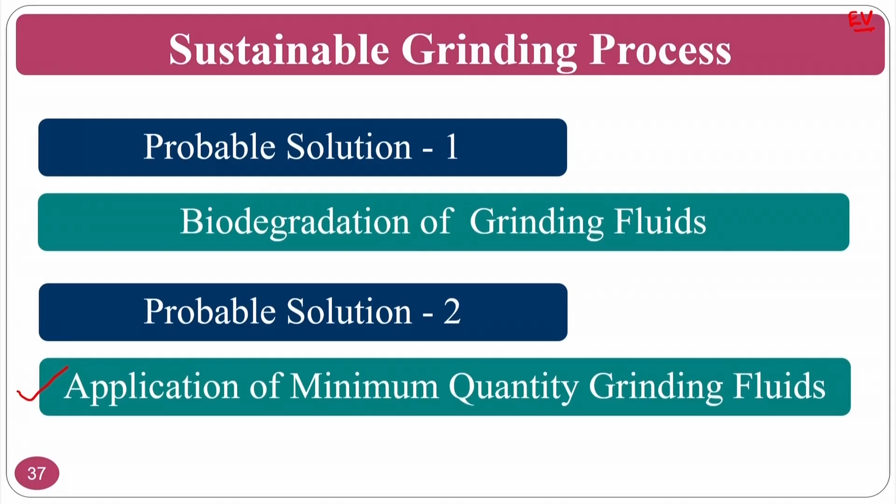So how do we go about the application of minimum quantity grinding fluid? The probable solution is minimum quantity cutting fluid, where you use the minimum amount of cutting fluid. Normally in flood cooling, where the cutting fluid drops by gravity, it will be 400 to 600 ml per minute. In this method, it normally ranges from 5 ml per hour onwards. It can increase or decrease depending on the air pressure used, and whether it's internal mixing or external mixing with the nozzles.

So what you are doing here is making the cutting fluid into a mist. You put in cutting fluid and highly compressed air, and these two mix to form droplets. These are the nanofluid or mist. The mist droplets fall into the grinding region. This is called minimum quantity lubrication, which we will see in expansion.

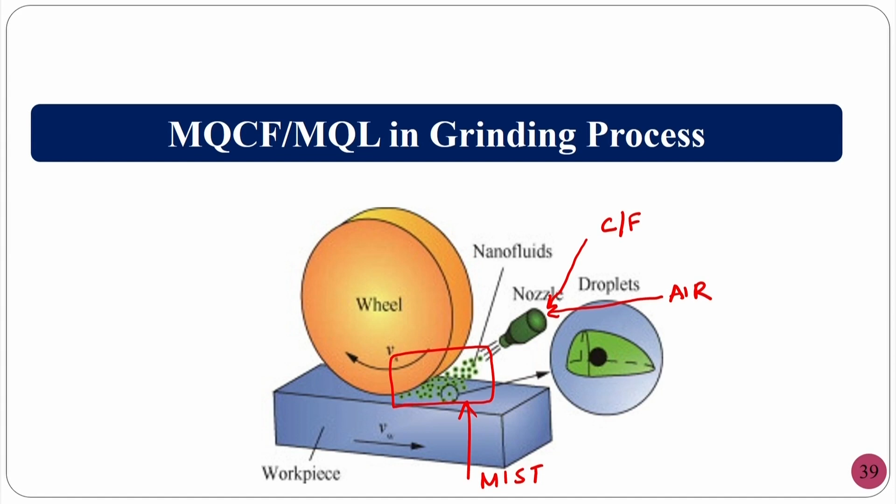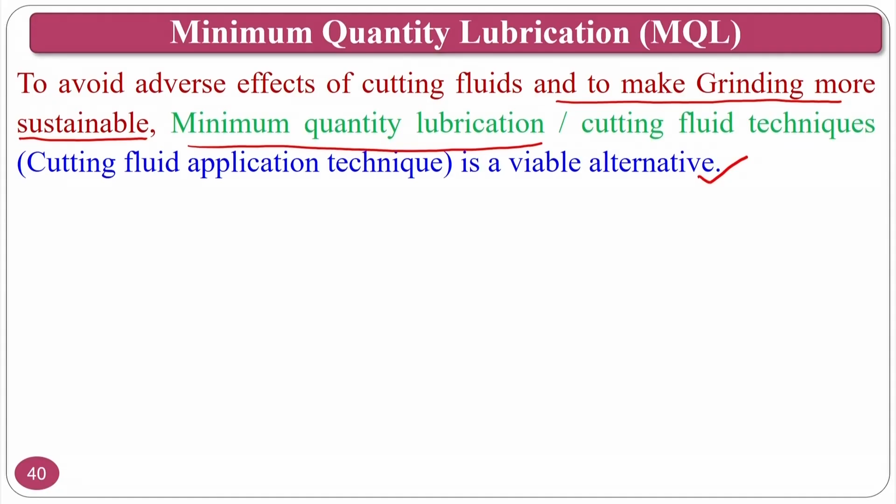To avoid the adverse effects of cutting fluid and make grinding more sustainable, minimum quantity lubrication or minimum quantity cutting fluid technique is a viable alternative to the flood cooling process. It uses a precision dispenser to supply a minuscule amount of cutting fluid to the wheel-workpiece interface, typically at a rate of 5 to 500 ml per hour.

You can see here, in flood cooling normally it will be like 500 ml per minute, whereas here it will be 500 ml per hour. That means you are reducing the amount of cutting fluid enormously, but without compromising the mechanical performance, that is, material removal or surface roughness and other things.

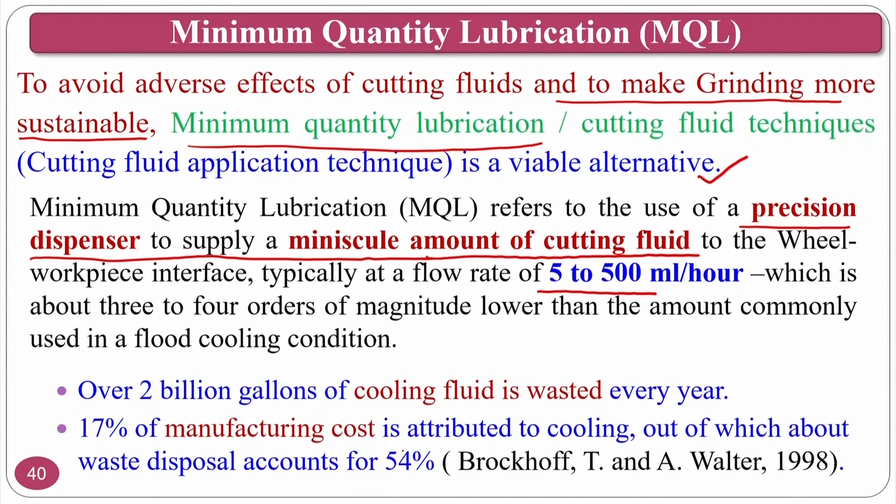If you see the literature, over 2 billion gallons of cutting fluid is wasted every year across the USA and across the globe. This cutting fluid has to be dumped somewhere. If 2 billion gallons of cutting fluid is dumped into rivers, sea bodies, or landfills, this is a drastic and dangerous thing that manufacturing industries are doing. So you should avoid that.

17% of the manufacturing cost is attributed to cutting fluid. Some books show 15%, some show 17-18%. Normally the range is 15 to 17% of the manufacturing cost attributed to cutting fluid.

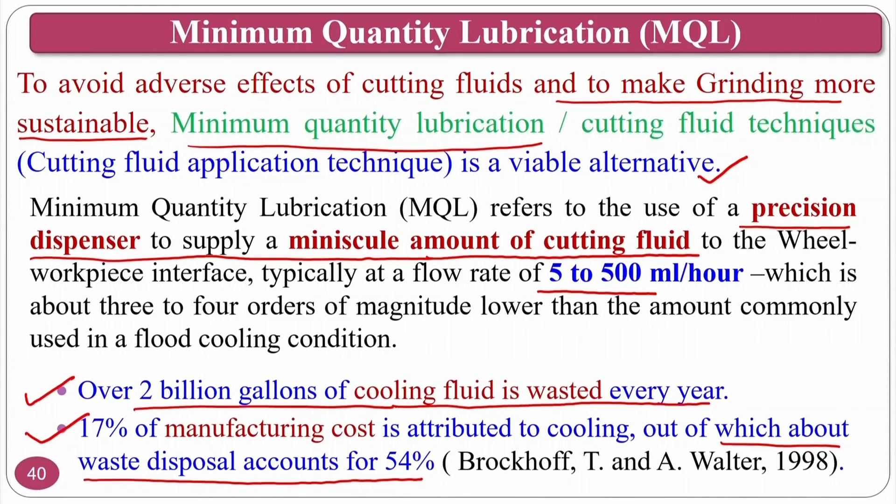At the same time, waste disposal accounts for 54%. That's why people just dump it, to avoid the additional cost of transportation and post-processing to make the cutting fluid biodegradable before dumping. To sell products at minimal prices, they avoid these things. But even if you sell at a slightly higher price, if you are helping nature and other people, that will be good.

What is minimum quantity cutting fluid? It is nothing but a cutting fluid mixed with highly compressed air, both mixing to come out as a droplet, nano size or micro size, an atomized mist.

Why are you mixing them? The convective heat transfer coefficient of the cutting fluid is very high, while the convective heat transfer coefficient of air is very low. Air is a gas, so it can penetrate into the interior zones of metal cutting or grinding, but liquid cutting fluid cannot. So we have one advantage and one disadvantage in the cutting fluid, and one advantage and one disadvantage in the air. The cutting fluid's high convective heat transfer coefficient is a positive, and the easy accessing capability of air being a gas is also a positive. So now we have to combine the two advantages.

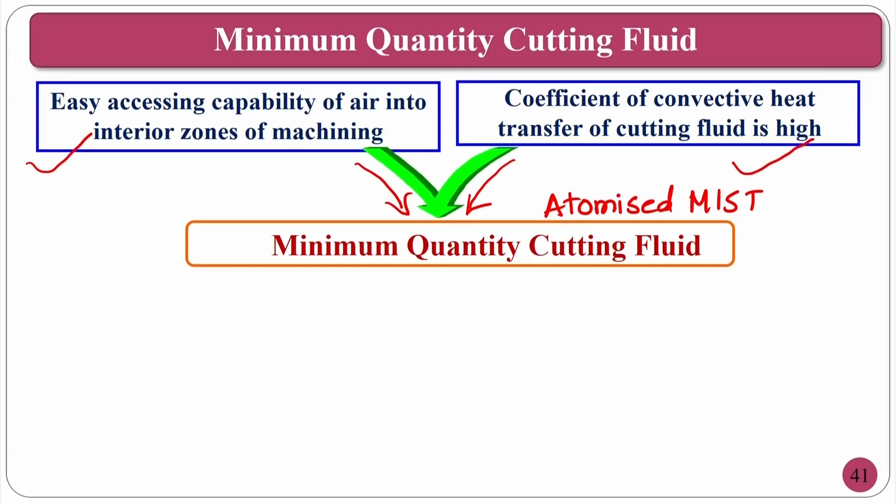Okay, in this atomized mist, what will happen? Convective heat transfer coefficient is retained, and at the same time it can penetrate, being a gas, into the interior zones of the machining or grinding process.

So as you can see, the cutting fluid mist is coming out of the nozzle and it is going in between the workpiece and the grinding wheel.

So your forced convection, in these circumstances, what will happen? The forced convection will take place and the heat transfer will be better, so that the performance of this finishing or machining, in terms of minimum quantity cutting fluid, will be much better compared to flood cooling.

The advantages: environmental friendly and green sustainable, because you are using very minute quantities of cutting fluid. No maintenance cost or waste, because here the mist goes off. There is no recycling or accumulating in the cutting fluid tank that you have to dump after some time, so there is no maintenance cost because it's one time use.

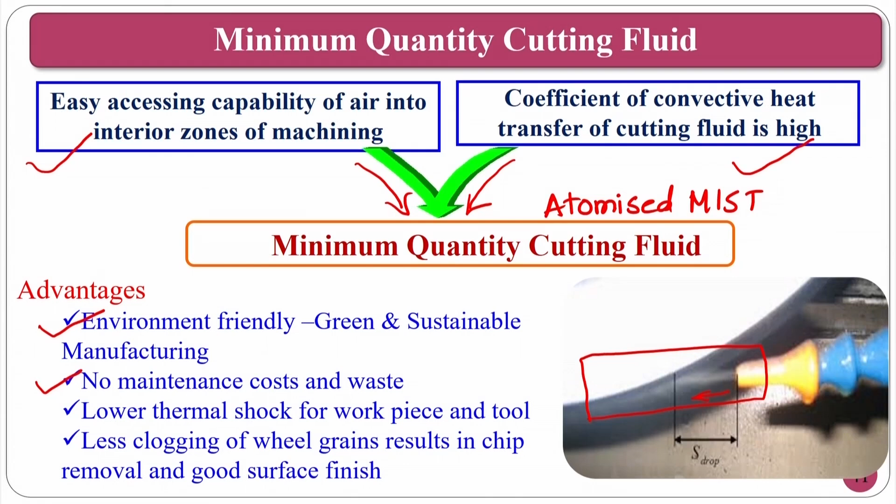So lower thermal shock for the workpiece and tool. Since it is a uniform mist which is a gas, and there is no cutting fluid impinging, there is no shock, and less clogging of wheel grains, because the gas is forcibly impinging onto the grinding wheel.

If there is clogging of the material because of this force, and because of the lubricity and cooling nature, this clogged workpiece material will come out of the wheel. So if the abrasives are very active because the clogged material is being taken out by the cutting fluid, good surface finish and material removal will take place.

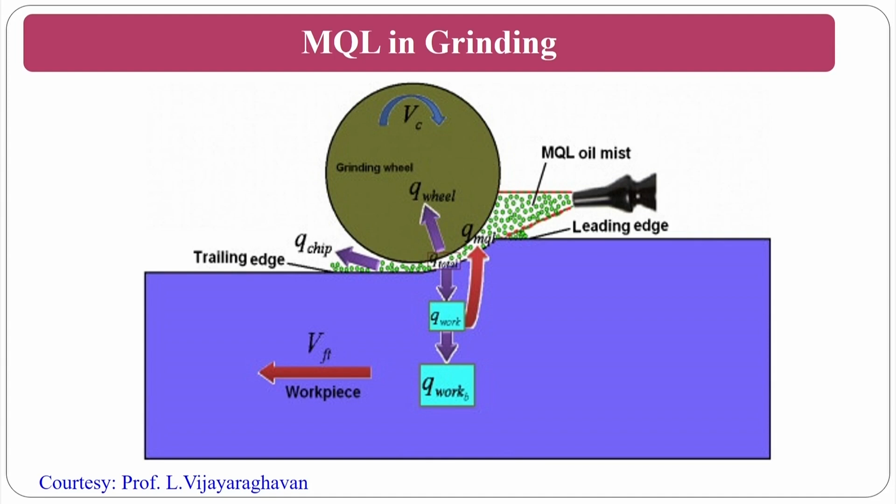As you can see here, MQL in grinding, the minimum quantity cutting fluid is coming and falling, so that the heat which is going out will be taken away, be it in the chip as well as the work. The basic advantage you get is the chip loading will be minimum, and the active abrasive particles will retain their original sharpness, so the surface roughness and MRR will be much better.

So commercially available setups - if you see the commercially available setups, this is a schematic diagram. You can see the mist, how this internally mixed mist system works, where the mist is coming in this region.

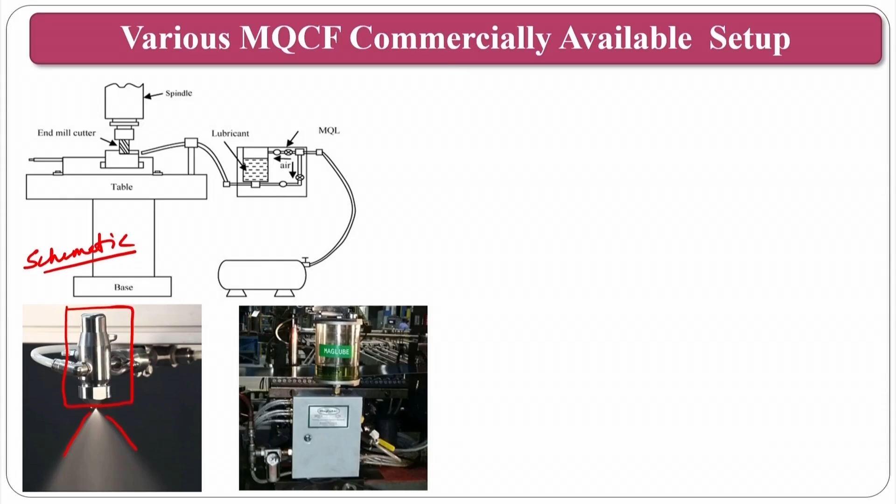The cutting fluid as well as the compressed air are mixing inside the chamber. Inside, it is mixing, then forming a mist, then it is forcibly sent out, and now you can direct your nozzle at a certain distance and certain angle as per your requirement. These are some other flexible types of nozzles.

You can have the cutting fluid as well as the air, mix it, and send out the atomized mist, so that you have a gas that consists of the convective heat transfer coefficient of a liquid, because you are atomizing the liquid.

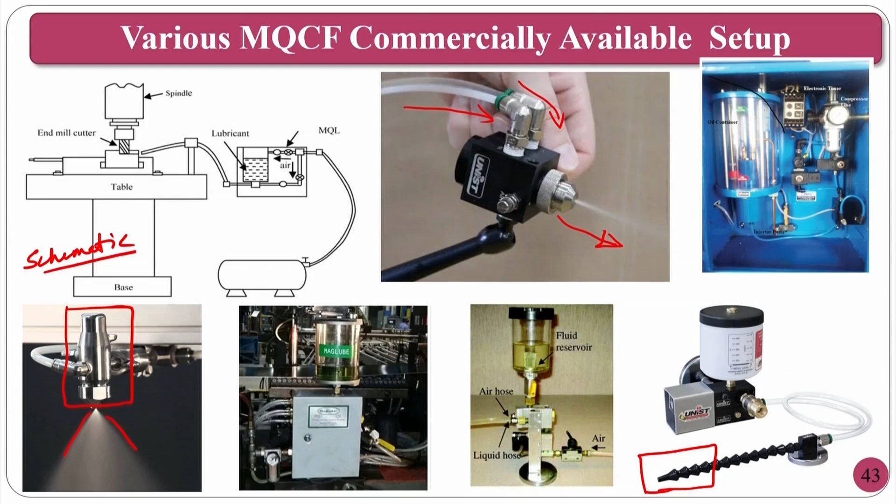These are other setups where you can use the systems - some are externally mixed, some are internally mixed, different setups. These are commercially available at economic price, excluding the compressor. You have to purchase a compressor separately, then these MQL, minimum quantity lubrication nozzles, are commercially available in the market. Normally in India you can get them at a price around 10,000 or so.

So if somebody is interested in doing an MQL system for grinding or machining or some other things, you can go ahead with it.

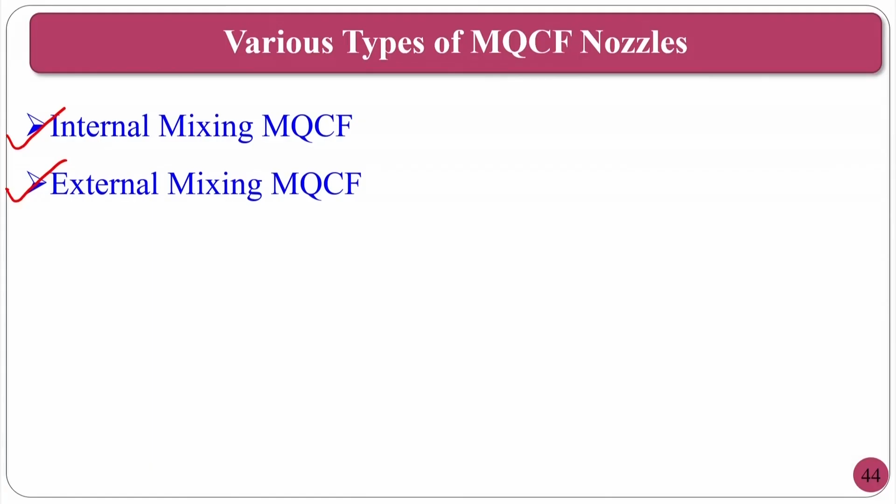Other types are normally internal mixing, as I said, or external mixing. What is internal mixing? If the cutting fluid and the compressed air mix within the chamber, then come out, that is called internal mixing. If the cutting fluid and compressed air mix outside the nozzle by virtue of pressure difference and other things, that is called external MQL or external mixing systems.

So these are the internal mixing systems - you can see here, one input is coming here, another input is coming here, both will mix and come out. This is called internal. And in some other places, two things pass externally like this, so externally mixed, internally mixed, and other variations can be. This may not be external also, I've just taken this particular example to explain.

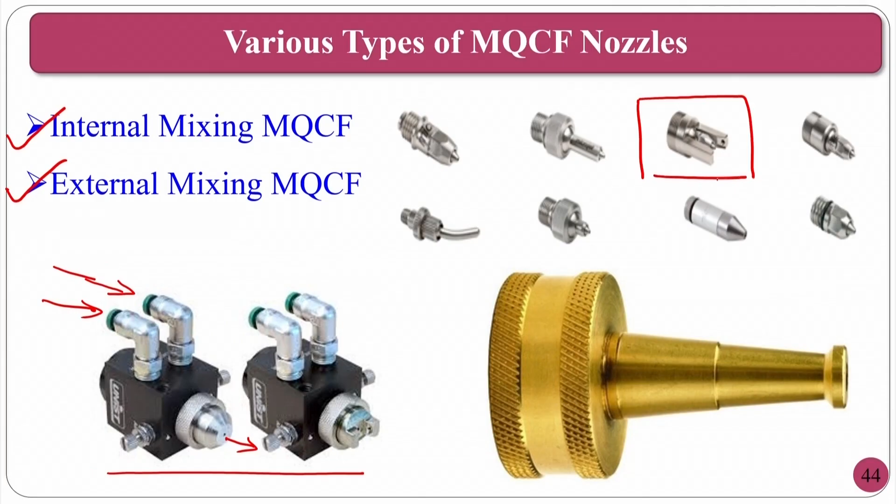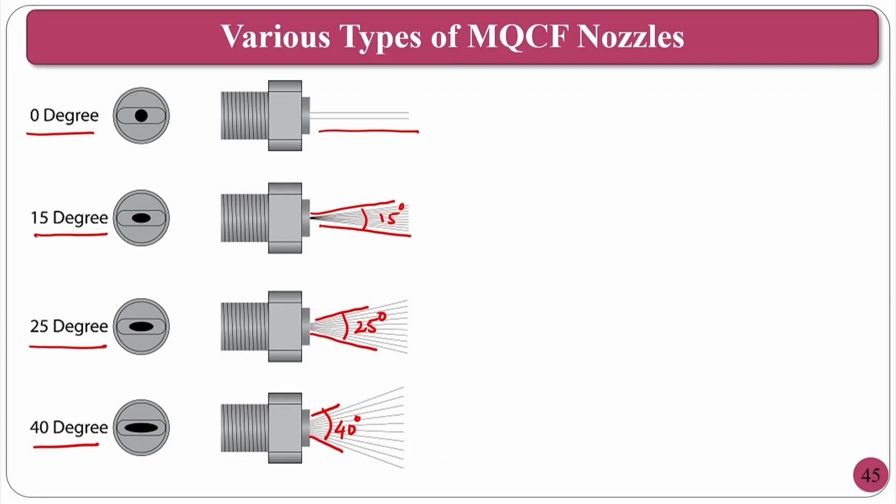So you can have as per your requirement. If you are going for a metal cutting operation, you have to choose one type of nozzle. If you are going for a grinding operation, because the grinding wheel has its own width, that width you have to cover, then you have to go for a certain shape where it should occupy the complete width. The thickness will vary. Assume the thickness is approximately 20 mm, so you have to cover 20 mm. If it is 40 mm, you have to cover 40 mm. According to your requirement, you can go for the nozzle divergence and other things.

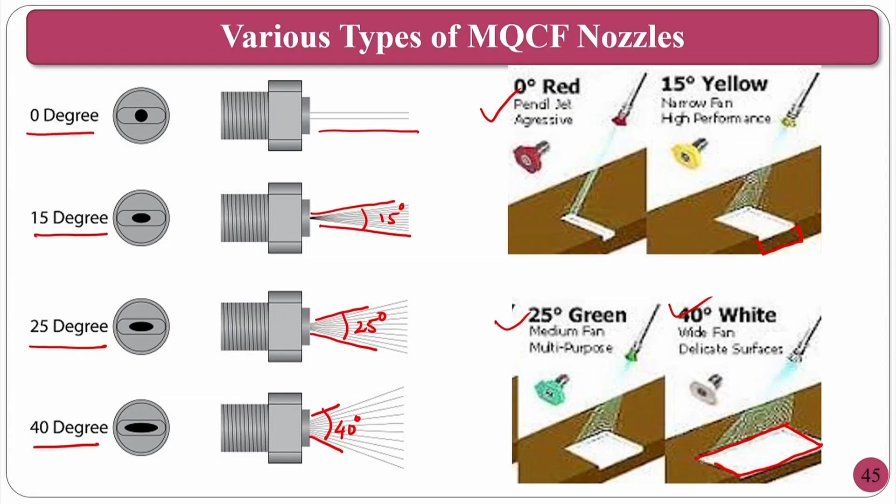Some other things are there, normally 0 degree where you can go for a small region, then 15 degrees where you can cover approximately this much region, and 25 degrees and 40 degrees. What will happen is you can see at one stretch how much space you can cover. This is the beauty about different nozzles.

I am giving you knowledge of this type of nozzles because you have to choose your own nozzle as per your requirement. You may be working on milling, somebody working on grinding, somebody may be working on some other thermal processes. I am not talking about laser machining or something. Some of you may be from the design department, some thermal specialization, some computational mechanics if you want to validate the simulations you have done. So your requirements person to person will vary, as taste varies from person to person. Similarly, your requirements also vary from person to person.

The selection of optimum cutting emulsion concentration is also one of the things. Many people normally bought the cutting fluid and just mixed it with water. No, how much water do you want to mix? Water is a better coolant; cutting fluid or mineral oil is a better lubricant. You have to optimize. As an engineer, you should have a quantitative value, you cannot go for qualitative things.

If you see here, water, how do you select? Water is well known to be the best cooling agent. Thus emulsions, that is mixing of cutting fluid and water with higher water content, provide better cooling and partial lubrication. If you mix 20 liters of water with 1 liter of cutting fluid, dominating cooling properties will come. If you have higher oil content in an emulsion, assume 1:1, 1 liter of cutting fluid and 1 liter of water, in that circumstance you will have dominating characteristics of lubrication.

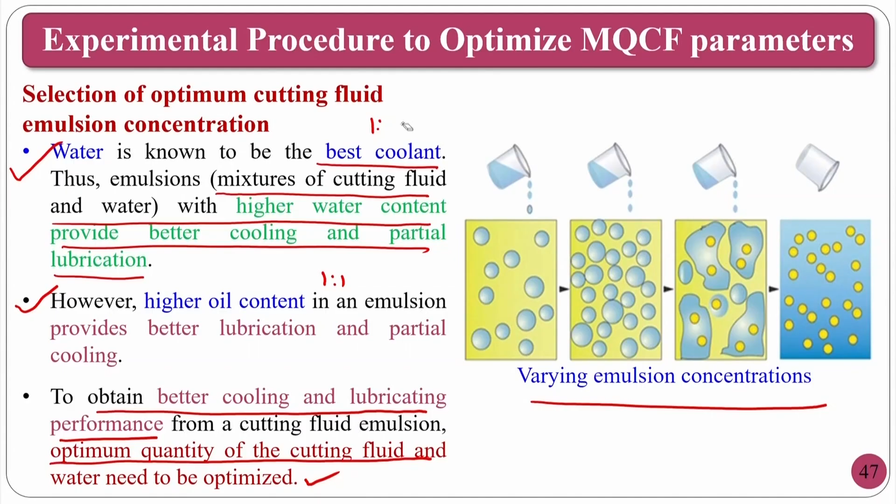So you should not go like that. In that circumstance, what you have to do is some preliminary tests to find the optimum composition. To obtain better cooling and lubricating performance from the cutting fluid emulsion, optimum quantity of cutting fluid and water mixing should be done at optimum quantities. So varying emulsion concentrations, you cannot go by 1:1, you cannot go by 1:20. You have to go for the optimum. How do you find that optimum value? For that purpose, there are some standard procedures.

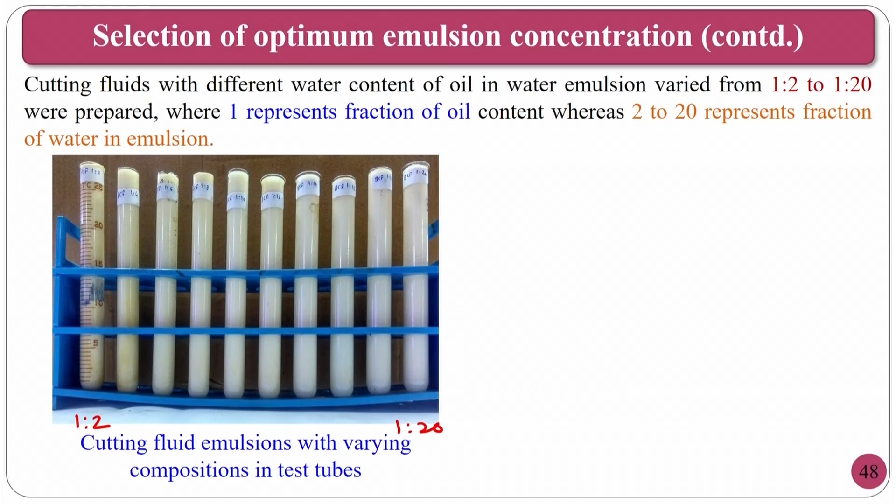In this particular thing, this is what we have done for metal cutting in the lathe process, but my intention is to show you how you have to optimize. What we have done is we varied from 1:2 to 1:20. 1 liter of cutting fluid we mixed with 2 liter, 4 liter, 6 liter, 8 liter, 10, 12, 14, 16, 18 and 20 liters. The basic concept shows that water is a better coolant, so 1:20 will be dominating cooling characteristics. At the same time, 1:2 will have better lubricating properties, but do I go for it? No, you have to choose.

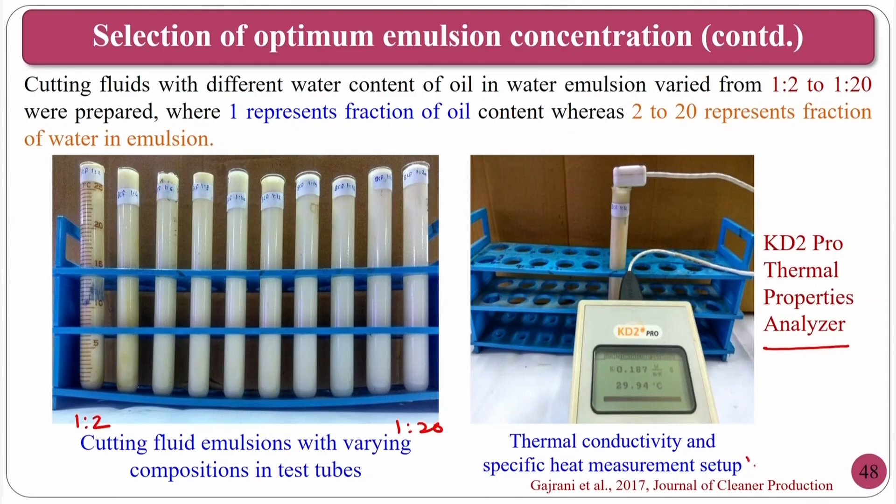For that purpose, first you need a thermal property analyzer, for thermal conductivity measurement. There is a KD2 Pro thermal properties analyzer where you can find the thermal conductivity of a cutting fluid. Why do you have to measure thermal conductivity? If it is very high, assume I am doing a machining or grinding operation, if the thermal conductivity of my fluid is very high, that means it can conduct more temperature or heat from the machining region or the grinding region.

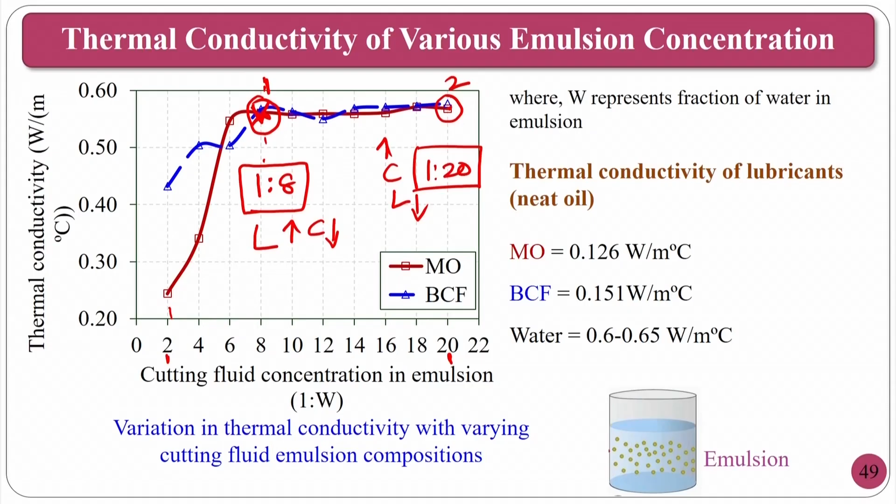From this graph, I can say I can go for 1:8 or 1:10, but if you use 1:8, you get better lubricating properties because you have 8 liters of water. Instead of 1:20, at 1:8 you will have better lubricating properties, but at 1:20 you will have better cooling properties. Cooling is less at 1:8, lubrication is less at 1:20. That is the beauty, so you can choose any value in between.

The second thing is to measure volumetric specific heat. This will tell you how much heat is taken out from the machining region. So the same composition, 2 to 20, we have done for the biocutting fluid and mineral oil, which you have seen in the previous class. Mineral oil is basically a petroleum product, biocutting fluid is basically a vegetable oil which is commercially available.

From the previous thermal conductivity curve, after 1:8 you can take any particular value. So you have to compromise lubrication or compromise cooling. In that circumstance, if you go for 1:16, that will be a better composition, because at 1:20 the lubricating properties will be less.

This is particularly for single point cutting tool machining process. If people want to go for grinding operation, they can go for approximately 1:12 or something, because you require better lubricating properties also. So a person can go in between 1:12 to 1:16, that is the best range for a grinding operation.

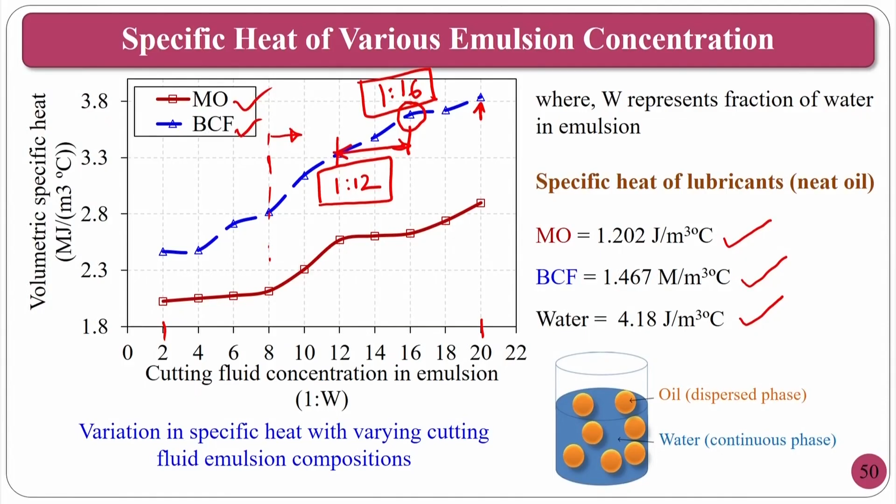You can see specific heat of the lubricants: mineral oil is 1.2, biocutting fluid is 1.4, water is approximately 4.2. In these circumstances, obviously water is better, but you have to optimize cooling and lubricating properties. That is why you should go in between 1:12.

Now you have optimized the nozzle, internal mixing or external mixing, both are good, and you have optimized the composition. Now you have to choose which type of nozzle you require for covering your application.

For single point cutting tool, people should go for flat fan with convex distribution, because the area of contact in the machining region, in the cutting tool, normally the chip-tool interface, will have an elliptical shape. If you want more details, I have already taught another course, Introduction to Machining and Machining Fluids, where this is explained, and I am just giving a glimpse here.

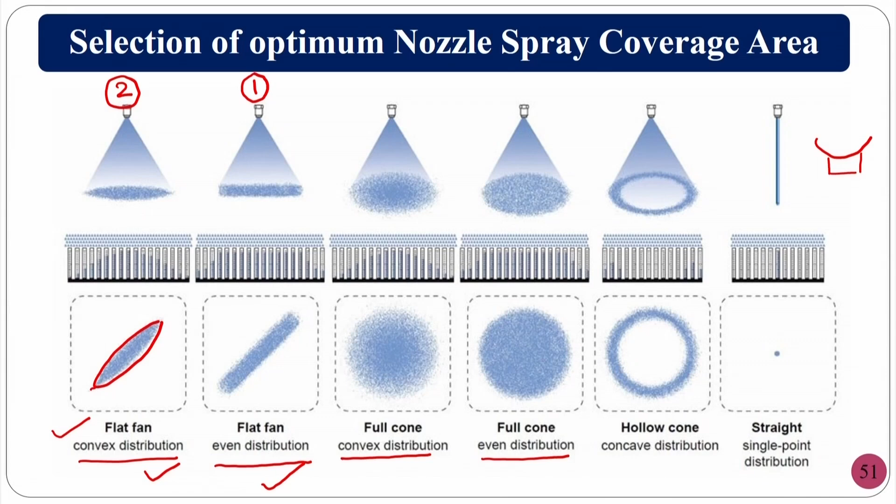Where you require always an elliptical type of area which has to be covered, and if you want to go for the grinding operation, the grinding wheel structure will be completely different from the single point cutting tool.

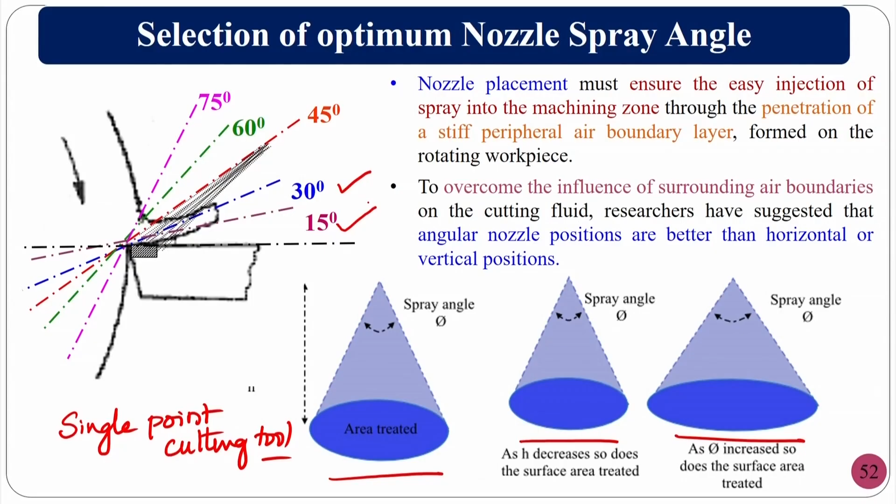So the better would be like 30 degrees, or even you can go for 15 degrees, or 45 degrees, but this may lose some of the velocity it is carrying. That may help you in terms of dressing the wheel, meaning taking out the loaded workpiece material in the form of chips if the structure is open.

So people nowadays are doing simulations and experiments on how, whenever compressed air and cutting fluid mix, the droplet is formed - what is the droplet size, what is the droplet velocity, and other things. We have taken some of this from our colleagues at IIT Madras, Professor L. Vijay Raghavan. Courtesy to him for sharing his slides.

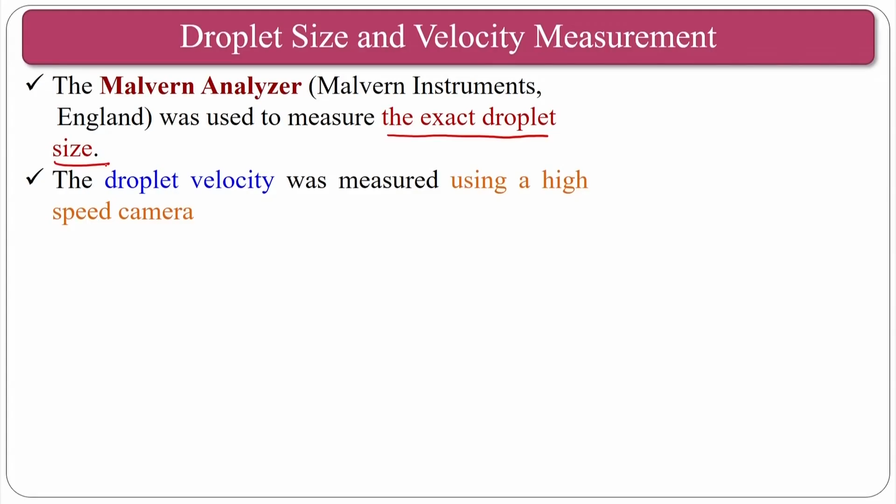What they have done is Malvern analyzer, which is used to measure the exact droplet size, and the droplet velocity was measured using a high speed camera. The Malvern particle size analyzer is kept here. You can see the laser light coming, and the oil mist particles coming, so it can measure the droplet size.

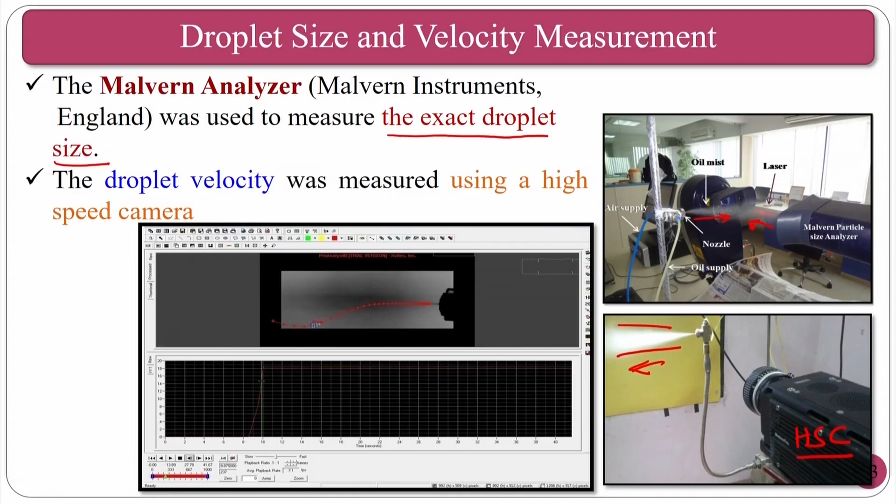At the same time, a high speed camera is there, and it will measure the velocity of the jet. They have already simulated this alongside the experimental measurement. People can also do computational fluid dynamics to measure various required things or to validate the experiments.

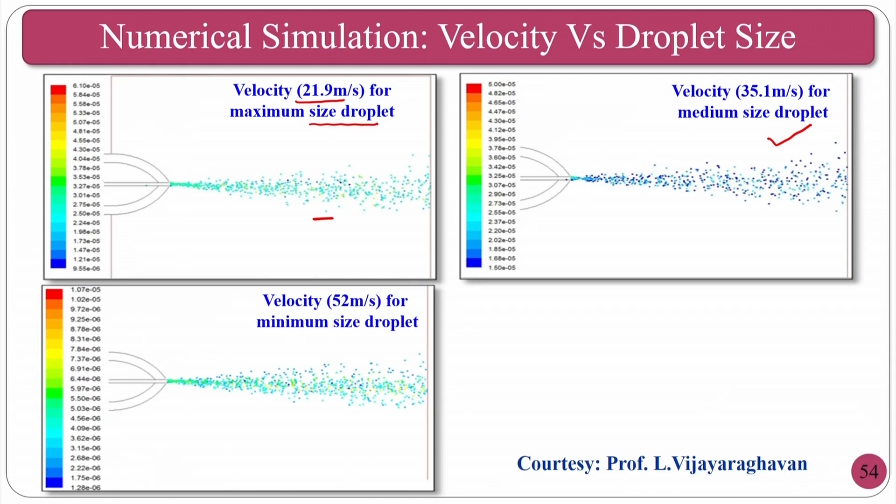If you want to increase the velocity, your cutting fluid supply is constant, so you are increasing the velocity of the pressurized jet. As the pressure increases, mist formation takes place - it will shear the cutting fluid into droplets, micro droplets, nano droplets, and so on. So as the pressure and velocity increase, the droplet size decreases.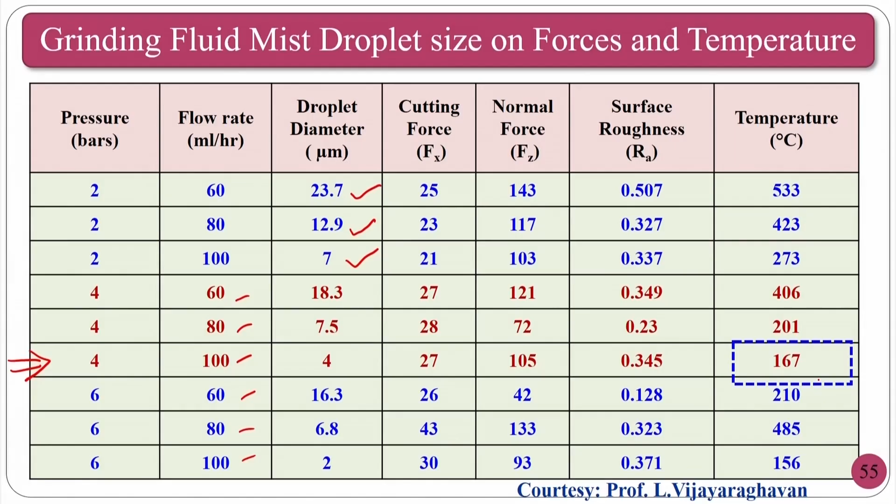In the better condition, the minimum temperature is achieved, which means the metallurgical changes of the workpiece are very minimal. That means proper machining is taking place in that particular region.

Wetting area calculations - wetting means, as you might have seen, super hydrophobic. I have already explained super hydrophobic and hydrophilic, where hydrophobic means fearing. Whenever a particle is on a lotus leaf, it goes off because it assumes it will fear the surface.

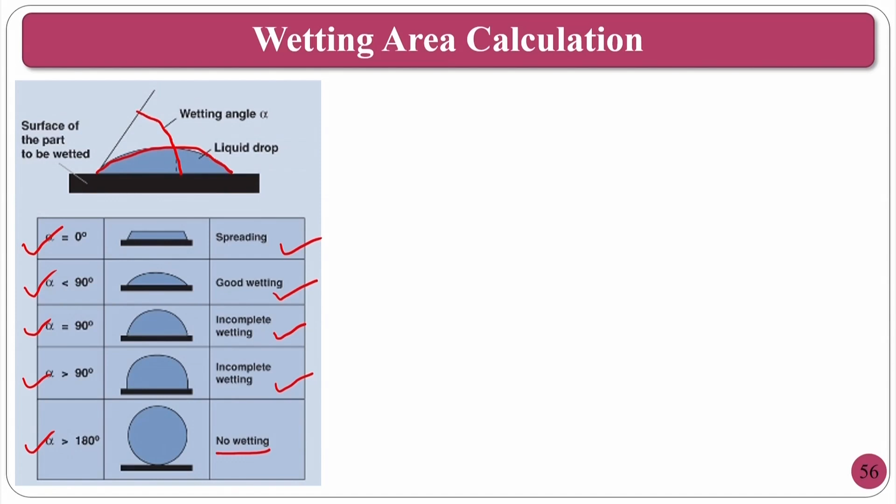To understand better: where alpha is 0, that is wetting angle is 0, which is called spreading. Alpha less than 90 is good wetting. Alpha equal to 90 is incomplete wetting, and greater than 180 is no wetting. Normally, whenever you have a droplet, the angle it makes with respect to the surface is the wetting angle. If theta is above 90, it's poor wetting; good and excellent wetting occur when theta is 0 degrees.

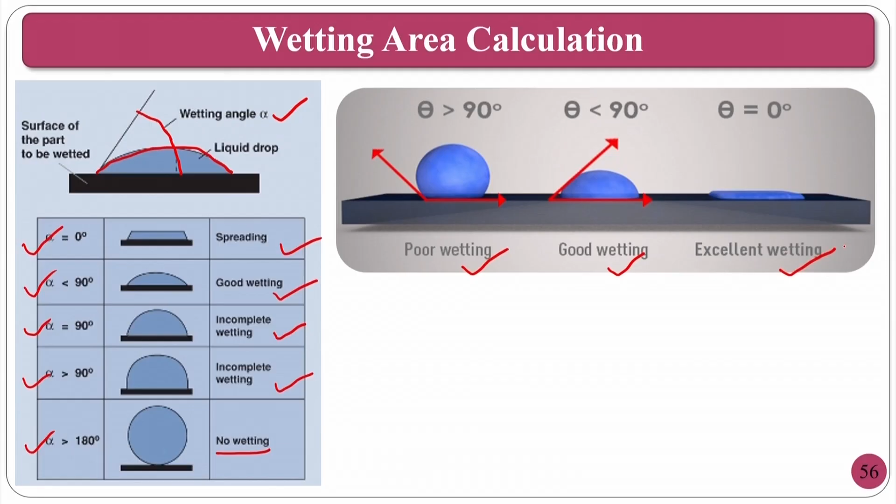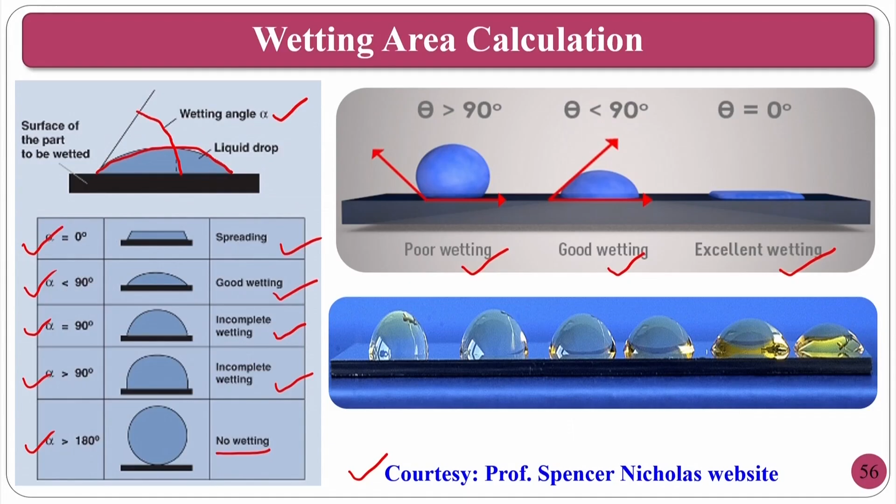This is taken from Professor Spencer's work, where he graded wettability by texturing surfaces. The wetting angle is calculated when a droplet of liquid - in this case grinding fluid - rests on a solid surface creating an interface; the angle between the droplet and the contact surface outline is known as the wetting angle or contact angle, alpha.

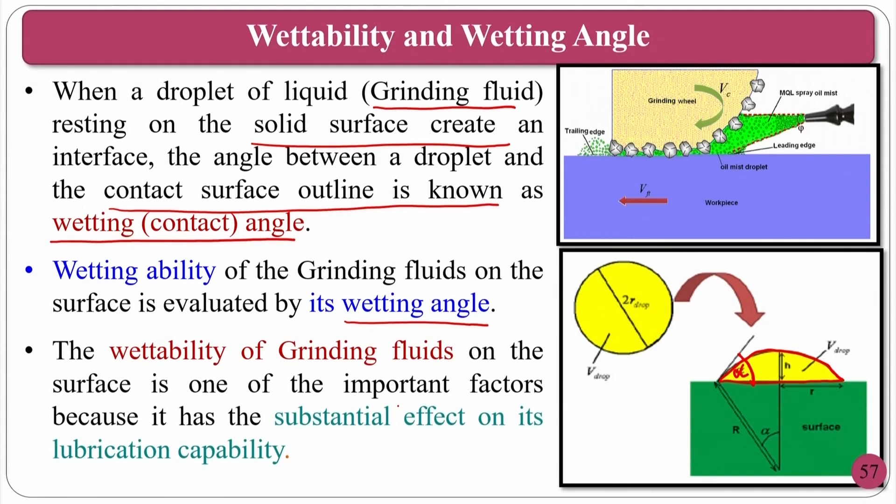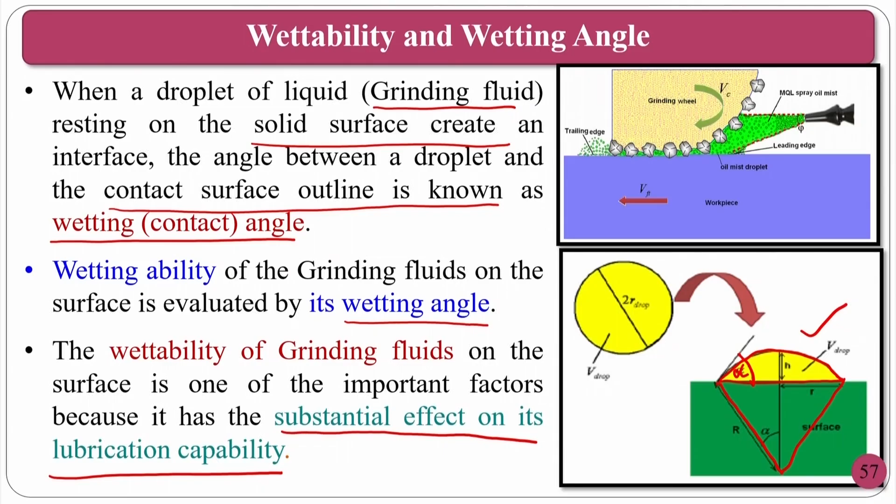So the wetting ability of grinding fluid on the surface is evaluated by the wetting angle, and this wettability is an important factor because it substantially affects lubrication capability. This is how you calculate the contact area of the fluid when it spreads on a workpiece surface. If the wetting ability is very good and it spreads well, it can easily cover the surface so that lubrication is proper.

You can here clearly see the same thing: 2 bar pressure and mass flow rate, 4 bar pressure mass flow rate, 6 bar pressure mass flow rate.

The wetting area, droplet diameters, you can see the droplet diameters. If you increase the pressure of the air, normally droplet size will go down, and mass flow rate also increases. The droplet diameter is minimum at 100 milliliter per hour and 6 bar pressure. At the same time, wetting area is high, meaning the percentage of wetting area is 33%.

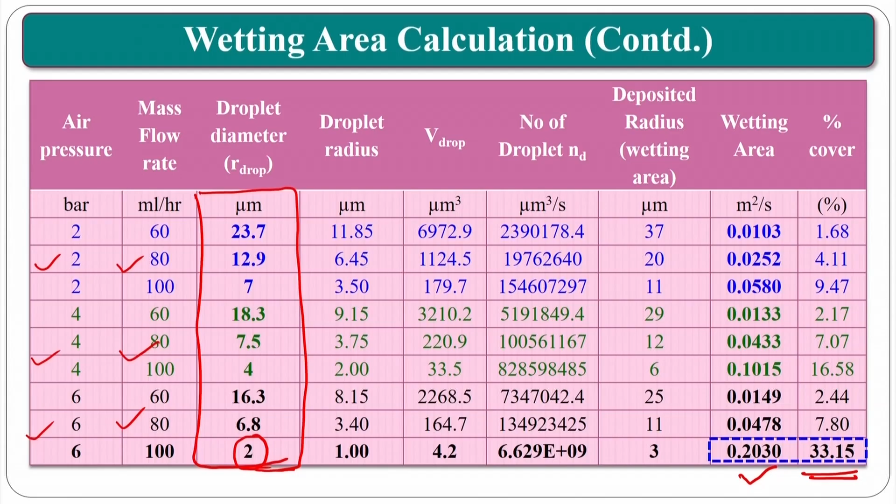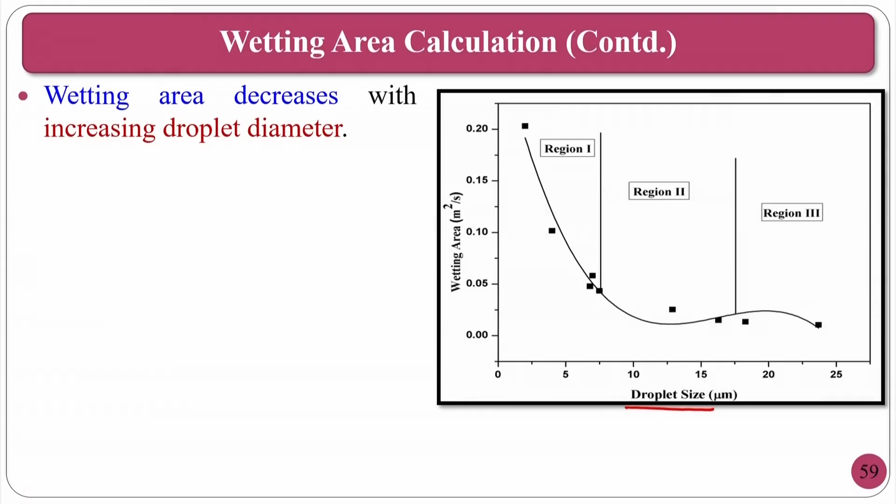As I said, if the droplet size is very small, it can penetrate, and at the same time it can spread easily on the surface. You can see here droplet size variation with respect to wetting area. As the droplet size decreases, the wetting area increases.

The larger wetting area leads to lower grinding temperature because it can easily take out the heat, not only based on wetting, but also because of its size. Surface area of the droplet will increase if it goes to nano size. Then both the cooling ability as well as penetrating ability will increase.

At the same time, if it is nano sized, believe me it can penetrate between the loaded chip in the successive abrasive grains, so that it can deload the chips. The lubrication reduces the cutting forces and cutting energy, while the convective heat transfer and boiling carries away the heat from the cutting zones.

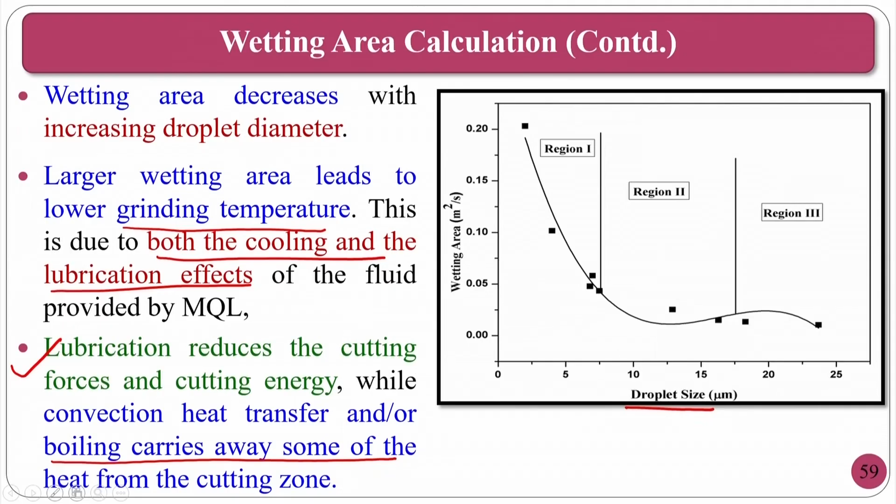This means it will improve performance in all respects: from the temperature point of view, surface roughness point of view, cooling point of view, lubricating point of view — all points of view it will be very good. Now we will see practically what is happening in the figures.

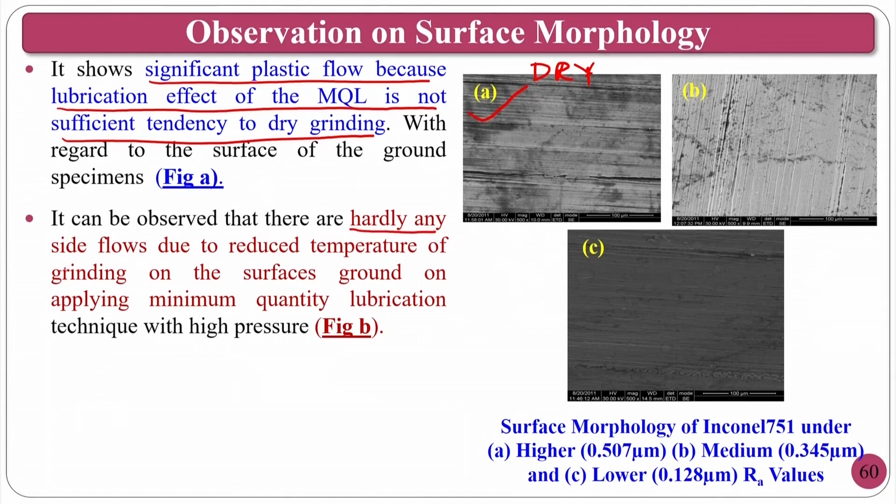In the second case, hardly any side flow occurs due to reduced temperature of grinding surfaces on applying the minimum quantity lubrication. Figure B is completed.

Figure C: because of the effective penetration of lubrication into the grinding zone and high pressure, it aids removal of adhering chips and other things. Compared to dry grinding, your minimum quantity cutting fluid utilization will always be good. That is the conclusion from the practical point of view.

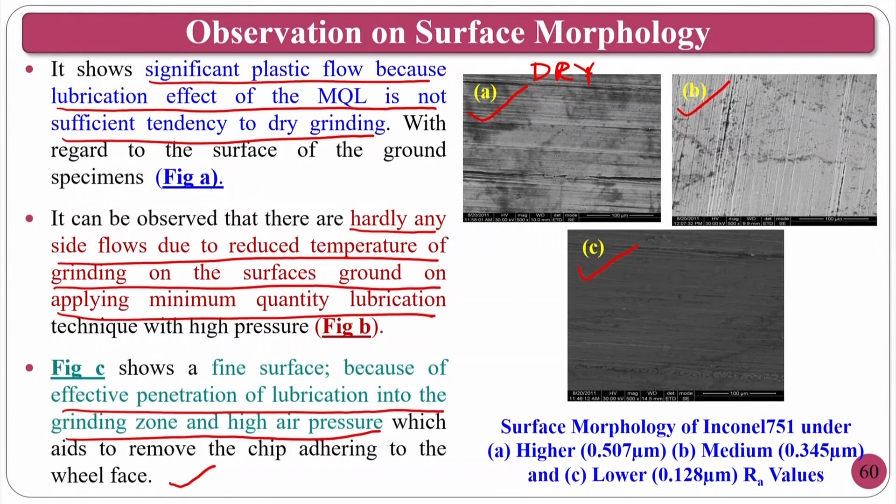These are the scanning electron microscope surfaces done on an Inconel surface, which is a superalloy, for grinding application, and they observe how the grinding marks are there, how the morphology is changing for dry, wet, and MQL.

Summary of this class: what all have we done? We have two solutions — one is biodegradation of the cutting fluid, another is using the minimum quantity cutting fluid.

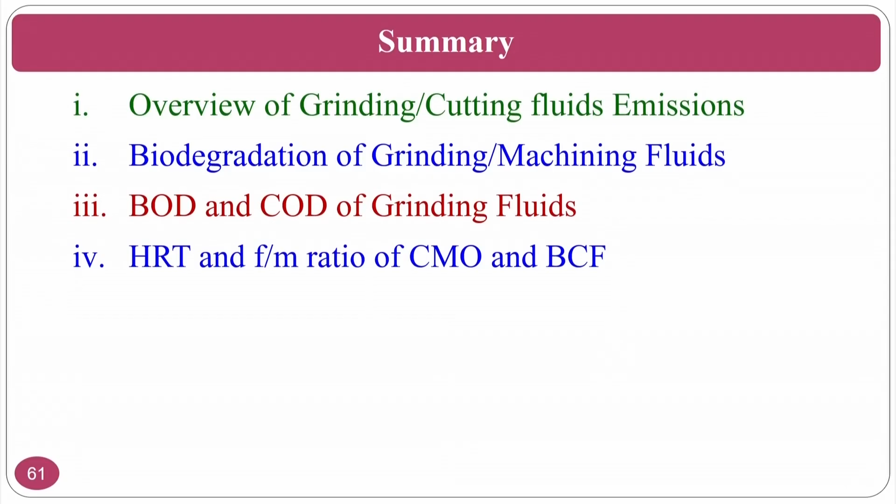In this particular class we have studied an overview of grinding and cutting fluid emissions, biodegradation of grinding fluids, BOD, COD, HRT, and F by M ratio — that is food to microbes ratio — and other things for commercial mineral oil as well as bio cutting fluid.

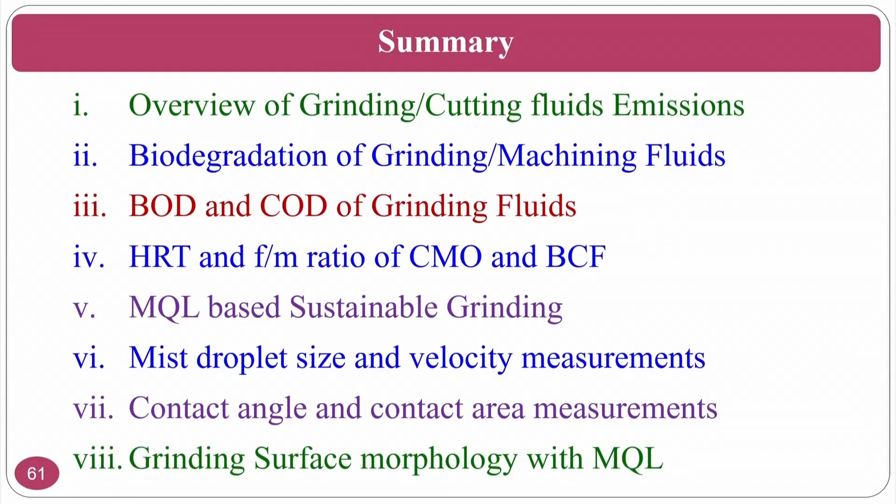MQL based sustainable grinding we have seen, and mist droplet size, velocity measurements and simulations. We have measured the contact area by the cutting fluid in the form of mist, and grinding surface morphology in minimum quantity cutting fluid grinding. This is about the sustainability of the grinding process.

I hope you understand the importance of cutting fluid — it has a positive side, but also a negative side. So to avoid these negative sides, as engineers we have to find solutions, and these solutions are two. One is biodegradation, meaning you have to treat this cutting fluid before dumping into landfills or nearby water bodies.

Otherwise, if you cannot do that, you can go for minimum quantity grinding fluids, where you use the minimum amount required and pressurize it with a high pressure jet. So forced convection takes place, particle sizes are very small, and contact area is very good.

So lubrication and cooling will be achieved and forced convection will occur compared to your conventional flood cooling, where free convection takes place. Forced convection is better than free convection, so the heat transfer in the grinding zone will be very high.

This is about the sustainability and some of the basics of grinding.